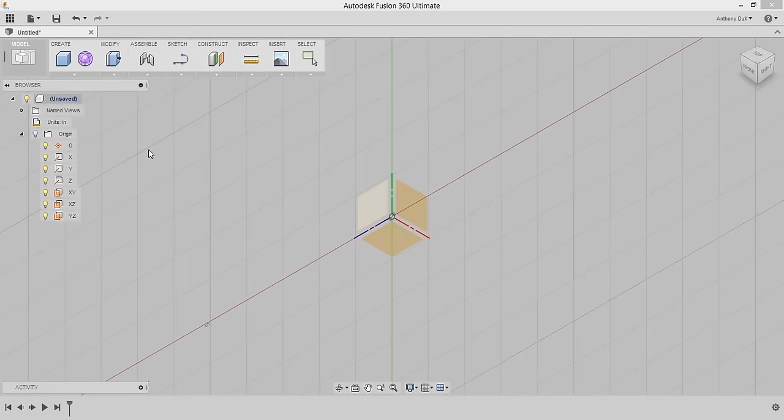If you're an Inventor user and you start using Fusion 360, it's a little bit different, but hopefully this tip will get you up and running a lot faster. One of the commands I love the most in Inventor is the ability to use primitives, and in Fusion 360 we have the same functionality. Except here, we're not starting out with a center point rectangle, but a typical 2-point rectangle.

As you can see in the palette, I can adjust the sizes, or I could simply start dragging the arrows, the little glyphs, and push and pull it all around to wherever I want it. We have the ability to create a new body or a new component. I'm just going to create a new body here.

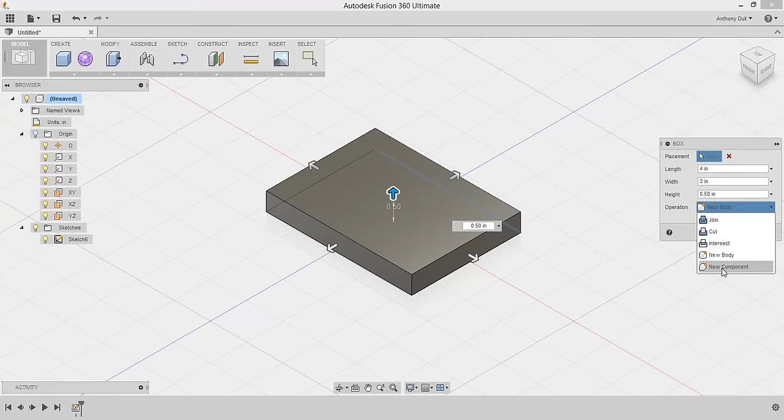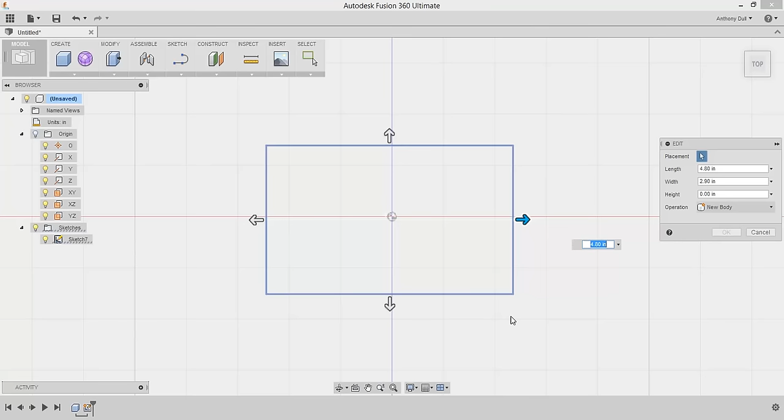If I look back at the top view, you can see I am not symmetrical around my 0,0. And if I go over and try to edit the original sketch, again I can push and pull, but I can't seem to lock it into that 0,0. I can eyeball it, get it close, but I want to be very precise with this. So that was a little confusing at first.

So what I'm going to do now is convert that body into an actual component. When I convert it to a component, we can start using other commands, such as move and align, or use joints to strategically locate it wherever we want this part to go.

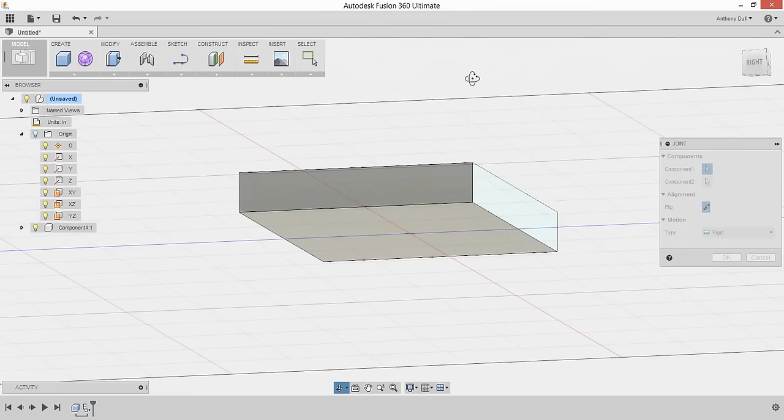Here I'm going to use a rigid joint, because I want to lock it right into the 0,0 from the center of this flat bottom face. So if I click the center of the face and click on my 0, it locks it in, but it rotates it up around the axis. And if I try to rotate it back, it's simply rotating it along the z-axis, which is not what I want.

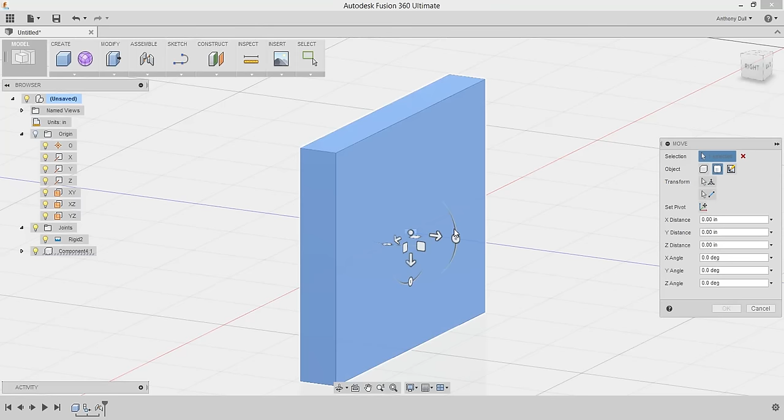So I'll keep my rigid joint, but I'm going to use the move command now, rotate that component around the x-axis 90 degrees and lock it in exactly where I want it. As you can see, it's still a rigid joint applied to it, and we are good to go. Very doable, but just a couple extra steps you've got to think about.

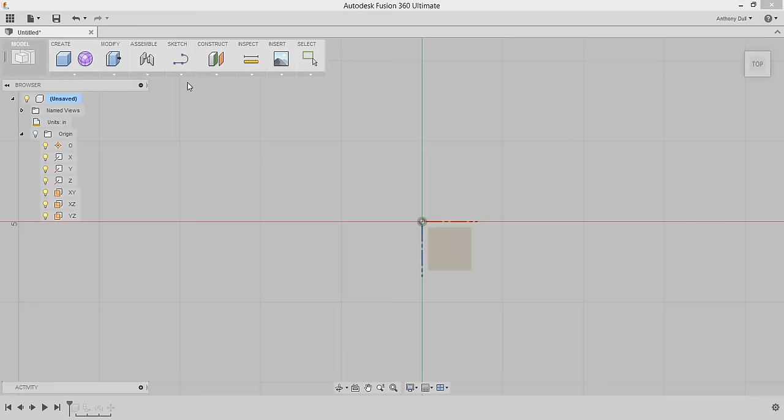So I'm going to roll back my history here, and we're going to start out another way. If I create a brand new sketch, I want to create a rectangle, but this time I have the option of creating a center point rectangle. Again, if I start a center point rectangle and pick 0,0, it'll be symmetrical all around. But let's start out with a typical 2-point rectangle.

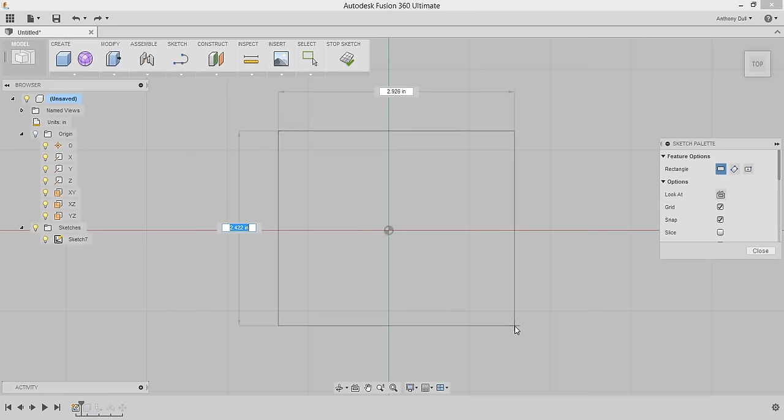When I draw a rectangle this way, I can simply type in my values by pressing the Tab key. I can toggle back and forth. If I go up and finish the sketch, or stop the sketch in Fusion 360, I'm going to simply do a push-pull to create a volume here.

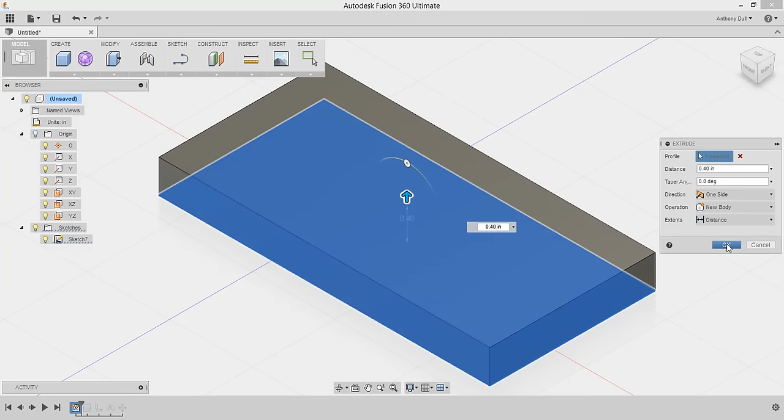Over in my palette, as you can see, I have the option of typing in values. I also have the ability to create a new body or a new component. We're going to stick with the new body. But this time in the history, you can see I have a little glyph for the sketch, and when I edit it, I can go back into the sketch and adjust the values.

One thing about Fusion 360 that I love is I can select on geometry, like in this case endpoints and my 0,0, and in my palette it'll simplify it and only show me the constraints applicable to the geometry I selected. So to locate this right around 0,0, I'm just going to drop in some points on the vertical and horizontal edge, and when I select them, I'll work out of my palette. You can see here we have a horizontal and vertical constraint.

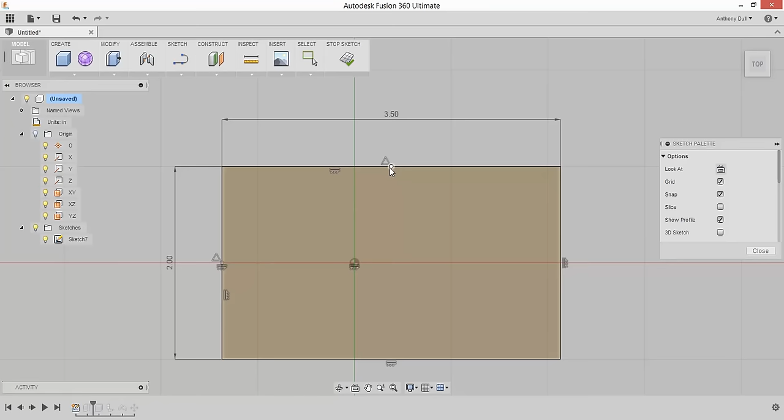So by selecting my points and then selecting horizontal vertical, I can simply lock it in right around 0,0, which is what I would expect to do. Again, both of these options are very doable and workable, and from here, if we wanted to, we could always convert this over to a component of its own and do whatever manipulation we would need to do. So whichever method you choose, the key is to know how to go back and modify that feature, especially when you're in that Inventor state of mind.